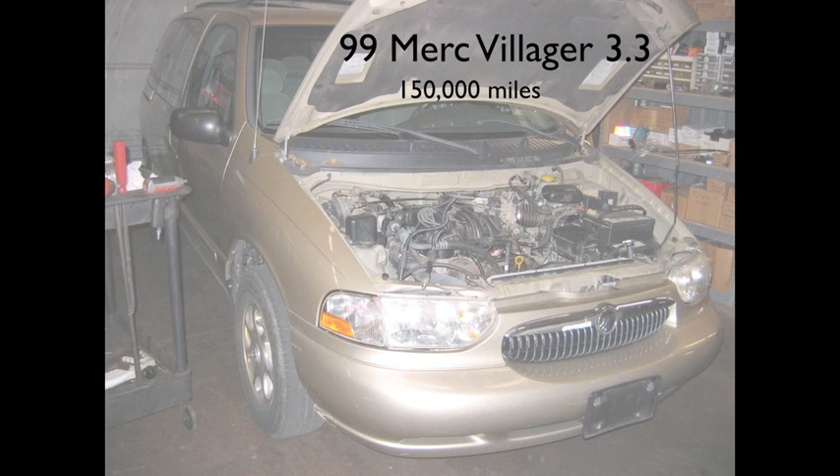You know, when we're trying to make a living fixing cars, you can't get paid on one until you fix it, and you can't fix it until you diagnose it. So it stands to reason that a quick diagnosis would mean a quick fix and getting a quicker payout. Let's take a look at an example. We've got a '99 Mercury Villager with a 3.3 and 150,000 miles on it.

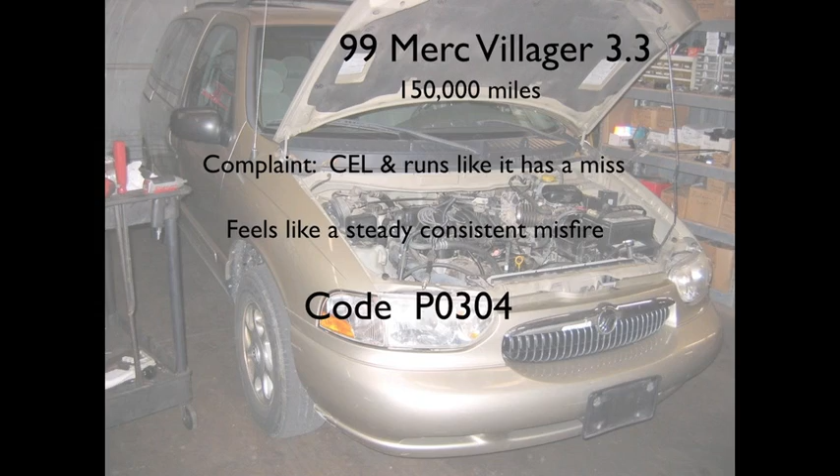When the customer brought it in, the complaint was that the check engine light was on and it ran like it had a miss. It feels like it's got a steady, consistent miss. And when we scanned it, we had code P0304, which indicates cylinder number 4 is misfiring. When we take a look at the intake here, now we've got to figure out a way to diagnose this quickly so that we can get paid on it. But we need evidence, right? How would you approach this?

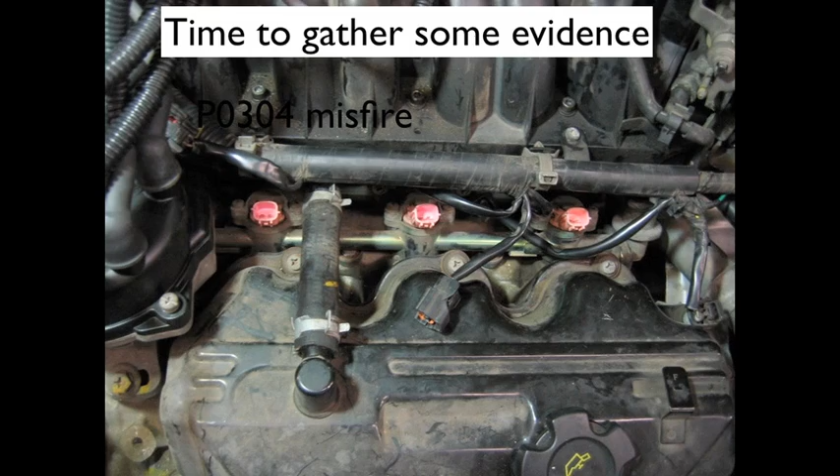Why would you do that? Now, diagnostically speaking, can you make any assumptions at this point? What are they, and how can they save you time? What step would you take next, and why? Now it's time to gather some evidence. We have a code P0304. We want to take out the spark plug and install a spark tester. Why are we doing that?

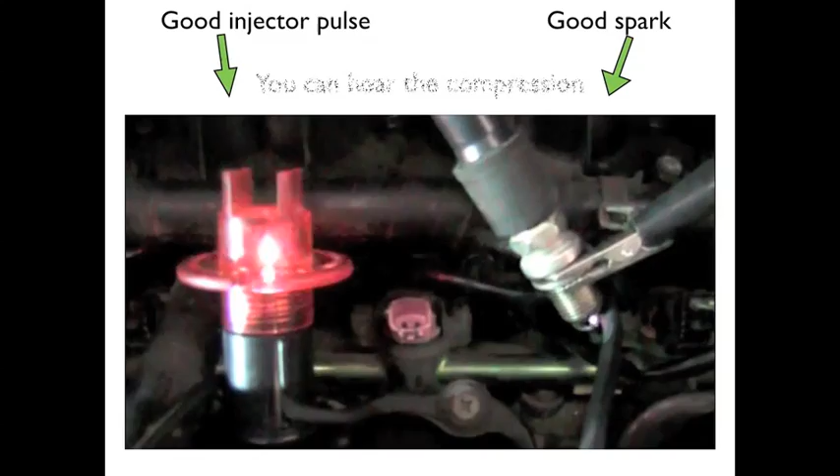Now you can see right here there's injector number 4. Luckily this one's pretty easy access. It's right up in front. So we want to install a noid light on the injector. Why are we doing that? Okay. Okay, what evidence does this method give you? What does the noid light tell you? Now, what does the noid light not tell you? How does that matter at this point?

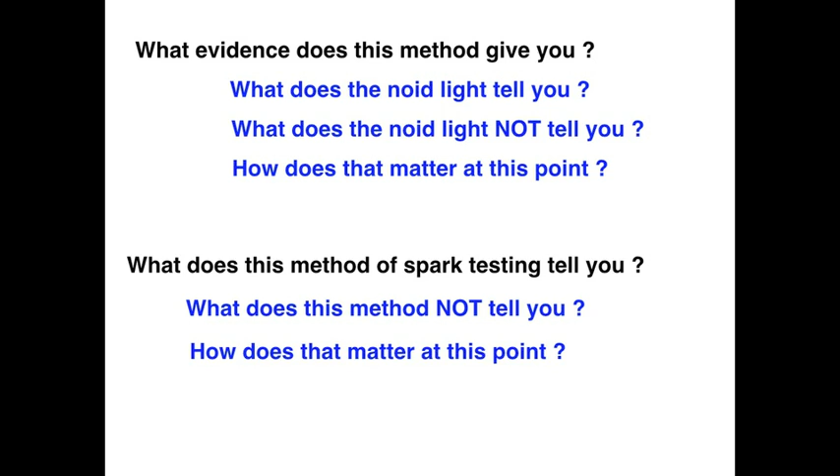What does this method of spark testing tell you? And what does this method not tell you? And how does that matter? What about hearing the compression? What does that tell you? Taking into consideration that you've got a P0304 indicating a cylinder number 4 misfire, is there a need to check the other cylinders at this point? Why and/or why not?

It starts, runs, and accelerates well. It just has a clear and present misfire. What evidence can you not see, but you can assume is there? Since it starts, runs, and accelerates well, there has to be adequate fuel delivery and pressure. And again, since it starts, runs, and accelerates well, but just has a clear and present misfire, we can rule out fuel pressure for now.

We can rule out compression for now because we can hear it. And we have good spark. We can see it. We also have injector control. We can see the pulse. But is it squirting fuel? So you need to know two things. What are they? Is it squirting fuel, and/or is it capable of squirting fuel? What's the next thing to check and why?

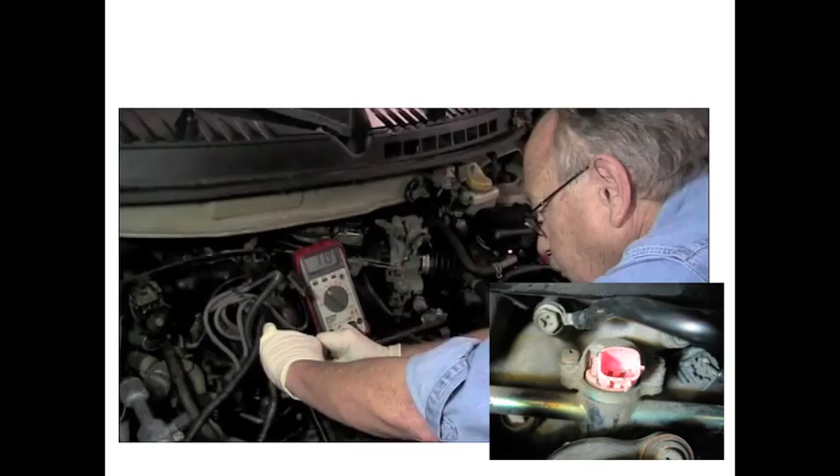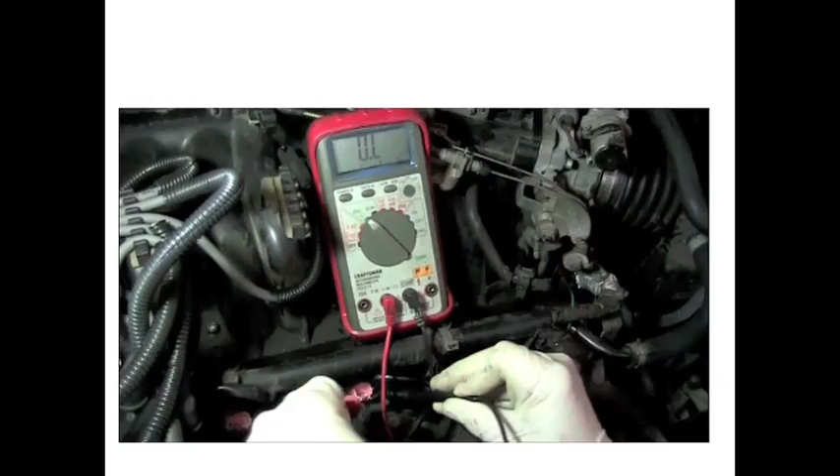Okay, we're using an ohmmeter to test the fuel injectors. We're on the first fuel injector. You can see by the pattern we got 11.8, 11.9. We're going to move to the second injector, the one that's suspected bad. Just use your red and black lead. And you see this one is out of limits. And we're going to go to the third injector.

You can see, tap in there. And 11.9. So we got 11.8, 11.9 ohms on two of them, but the middle one's out of limits, so that middle injector's got an open in it.

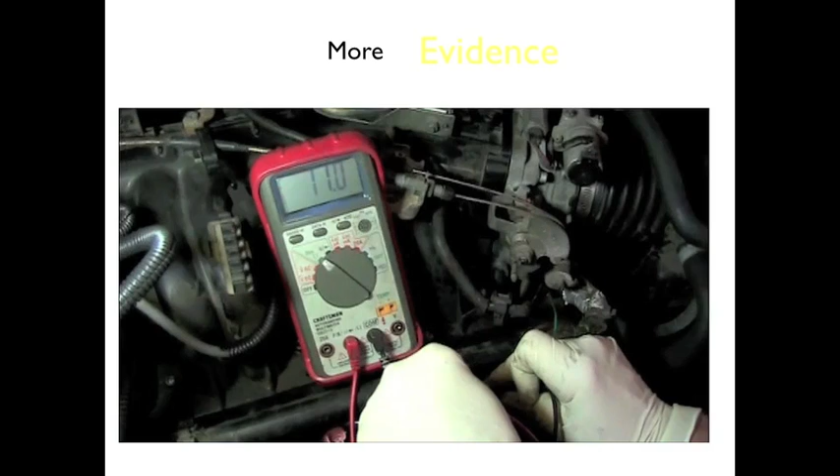So we installed a new injector, and it ran normally. The faster you can diagnose it, the faster you can fix it, and the faster you can get paid on it. Well, you might be saying that that was pretty easy, nothing real tough there. So you want to see something a little bit tougher. Okay, let's look at the same type of problem.

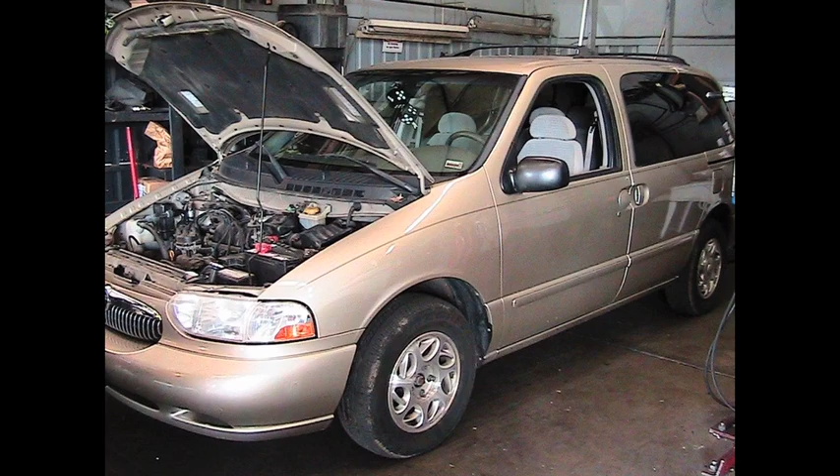Only this time we've got a 99 Mercury Villager 3.3, it's about 150,000 miles on it. The same complaint. Check engine light, runs rough, feels like it's got a steady, consistent misfire. This time we've got a code P0305, which indicates cylinder number 5 is misfiring. So we got the same age vehicle, same miles, same complaint, and basically the same situation.

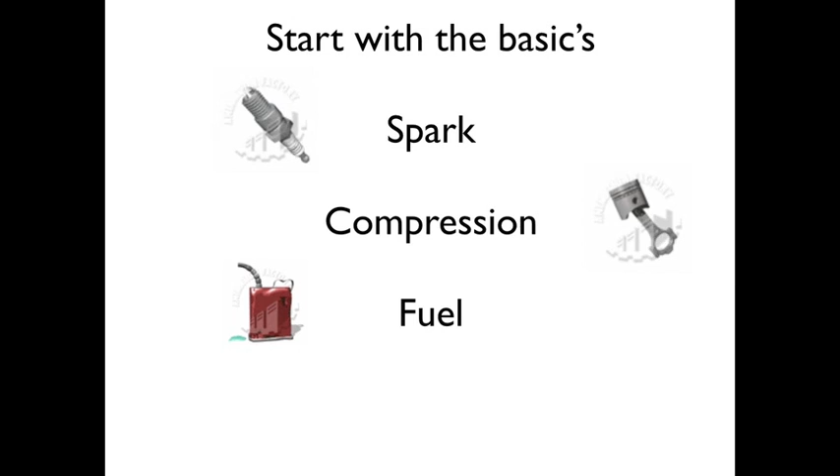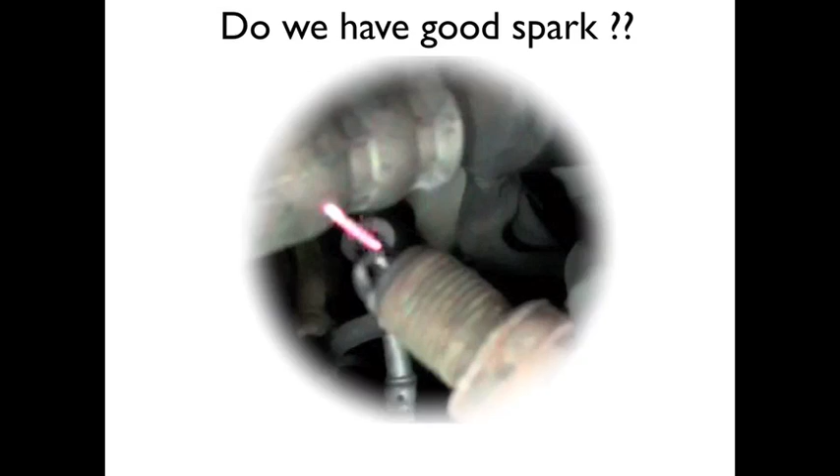So what do we want to do? Start with the basics, right? Spark, compression, fuel. So since it's running and accelerating well, we can rule out fuel pressure at this point. Do we have good spark? Well, let's see. Okay, if you look at that spark, and you've seen some of our other videos, then you can tell we've got at least 40 kV. So there is sufficient. There is plenty of spark.

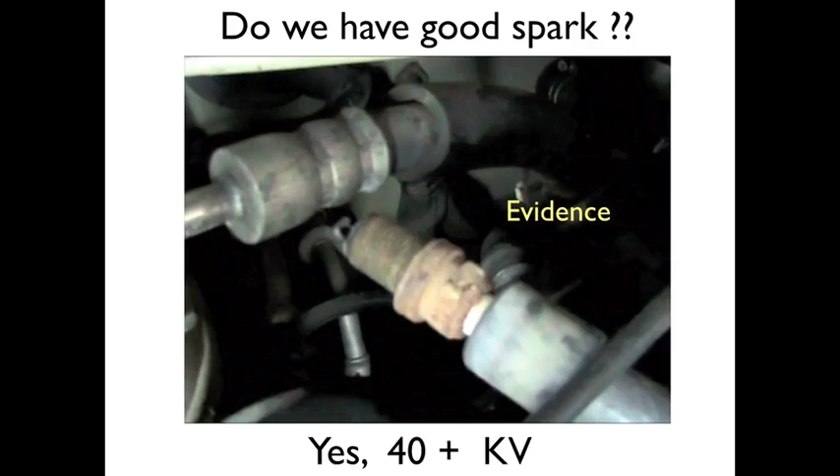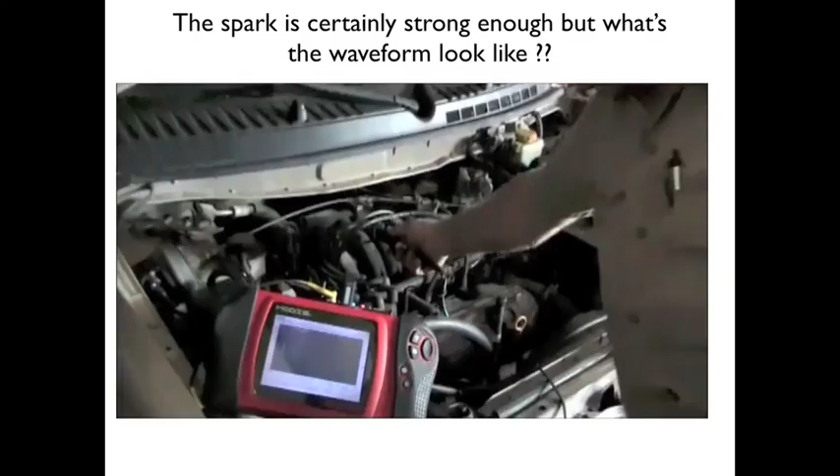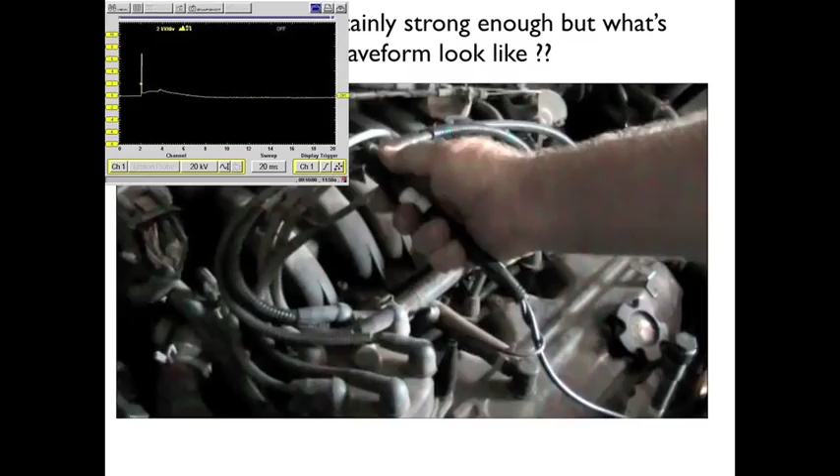Okay, we're looking for the ignition. We're going to test spark to see where we've got it. We're coming here. We're hooking up to a known good spark plug, not the one under suspicion. If you look at the lab scope, you can see a good secondary ignition pattern. I'll switch back over here. I'm going to switch to a second good one. Go back to the lab scope. You can still see the good pattern.

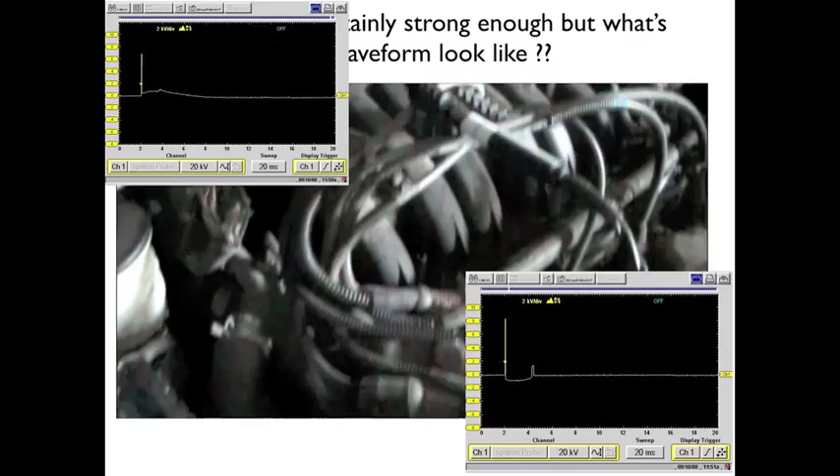Now we'll go back to the suspicious one, which is number 5. And we'll hook on to number 5. Go back to the scope and you can see the bad pattern. We've got negative burn time. Your spark is firing. Negative burn time. Something's wrong with that injector.

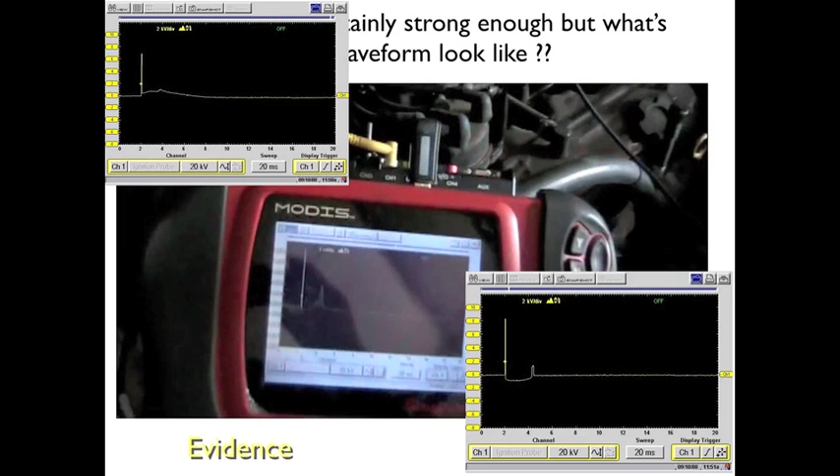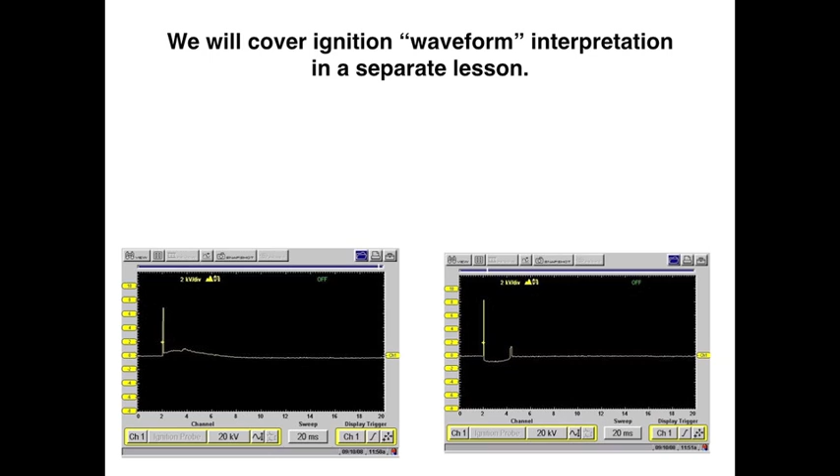So the first question is, what is an ignition waveform and what can it tell you? Second question, in the video, why did I look at more than one waveform? Okay, we'll cover ignition waveform interpretation in a completely separate lesson. But for now, what do you see different in these two waveforms? So understanding what waveforms are, why is this evidence?

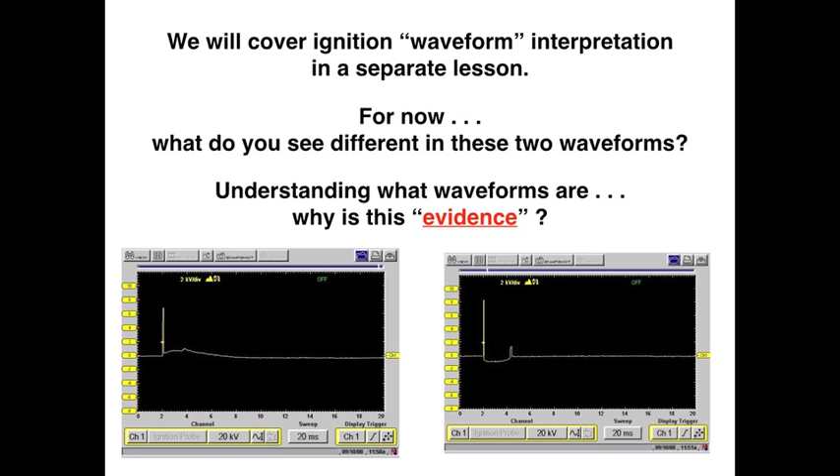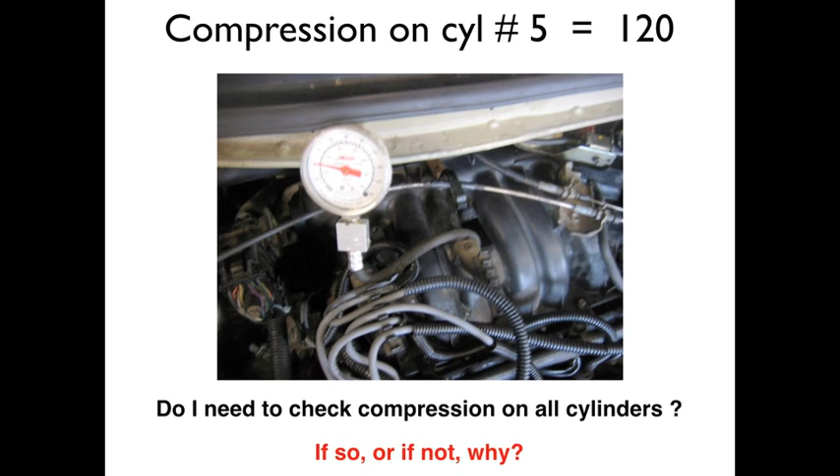So we do a compression check and we see on cylinder number 5, the one that's missing, we got 120 pounds. Do I need to check compression on all the cylinders? If so, or if not, why do you say that? So spark is good, compression is good. So by the process of elimination, are we safe to say that it must be a bad injector?

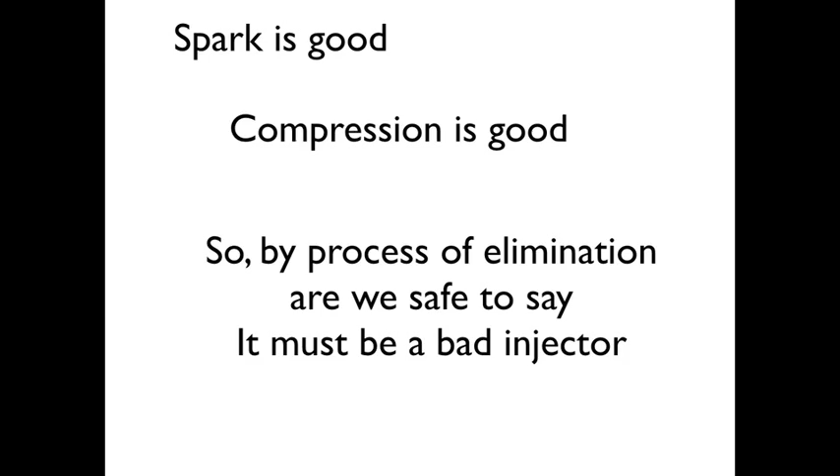Okay, here's the intake. Now you can see the plastic intake is still installed. And when you look at the front of the engine, you can see that we've got the front injectors and the front spark plugs that have pretty good access. Pretty easy to get to all of them. That's one thing that's nice about this type of situation. However, injector number 5 is under the intake. It's under the plastic intake.

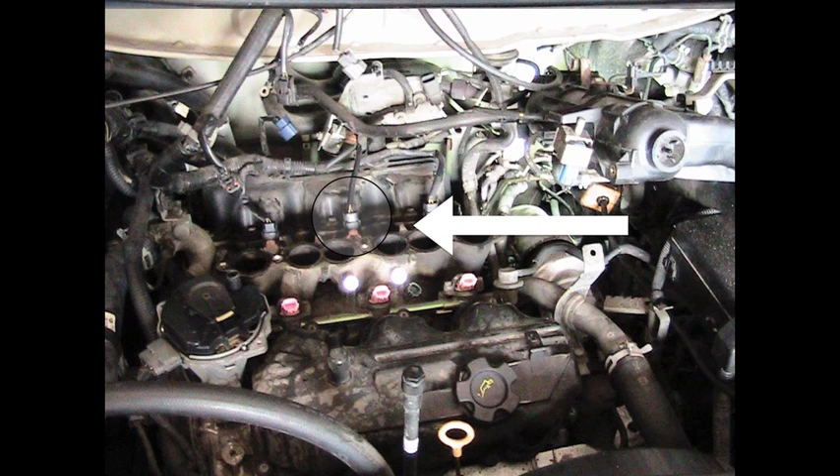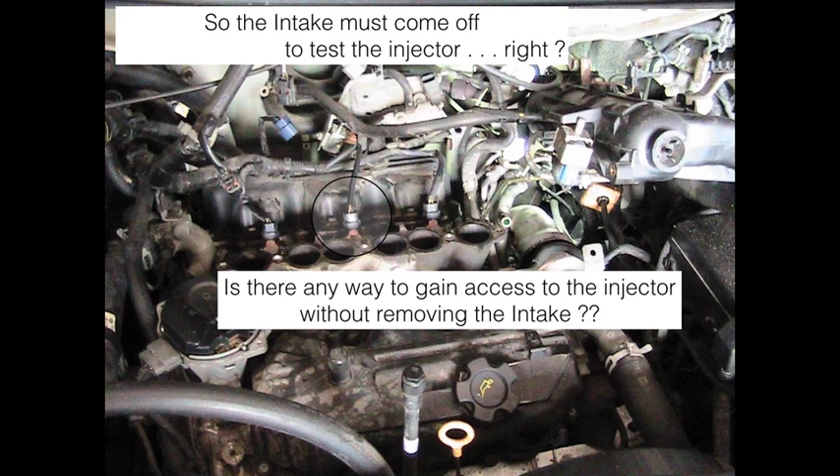In fact, when you take the intake off, you can see there is injector number 5, and we're pretty suspicious that number 5 is the injector, right? So the intake has got to come off to test the injector, right? Is there any way to gain access to that injector without removing the intake? Well, let me ask you this. What, in relationship to the injector, is not under the intake?

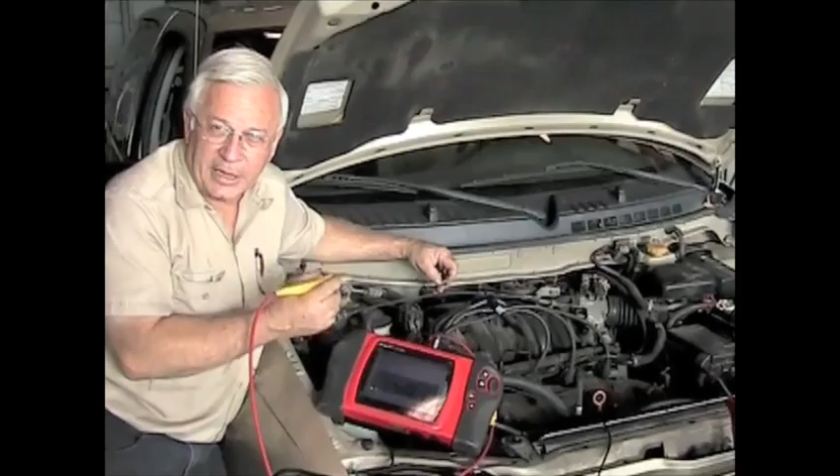So if we look at the engine with the intake installed, let's look right over here. That is a connector for all of the injectors. So the injector wires are under the intake, but they can be accessed from above by going to where those wires connect. Okay, I'm going to try and test for an injector. I'm going to first test a good injector so you can see that, and then go to the bad injector wire. We're going to the best connection right here.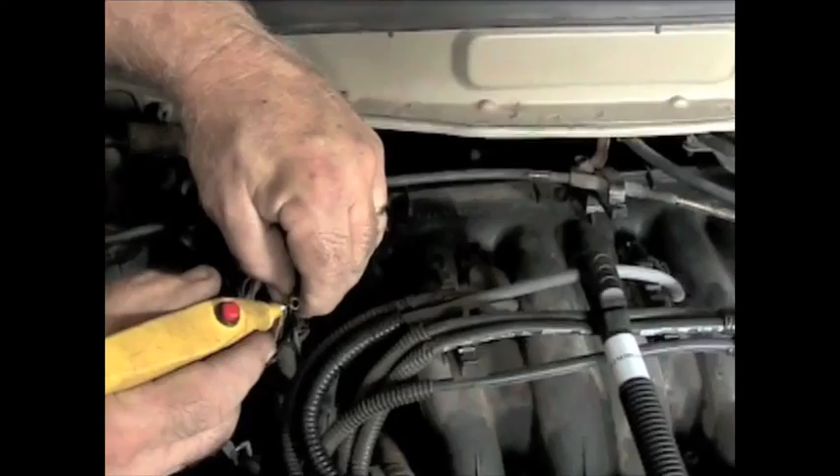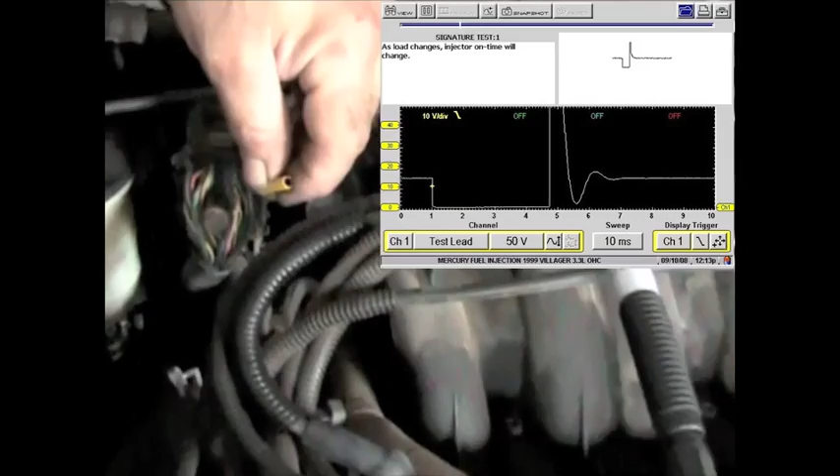Come down in here, locate my wire, pierce the wire. Now if you look at the lab scope, you can see the good injector pattern. I'm going to take that out of there, come back to the harness. I'm going to go to my suspect injector. Go to the lab scope and there's no signal. We got a dead injector. Got an open circuit in that injector.

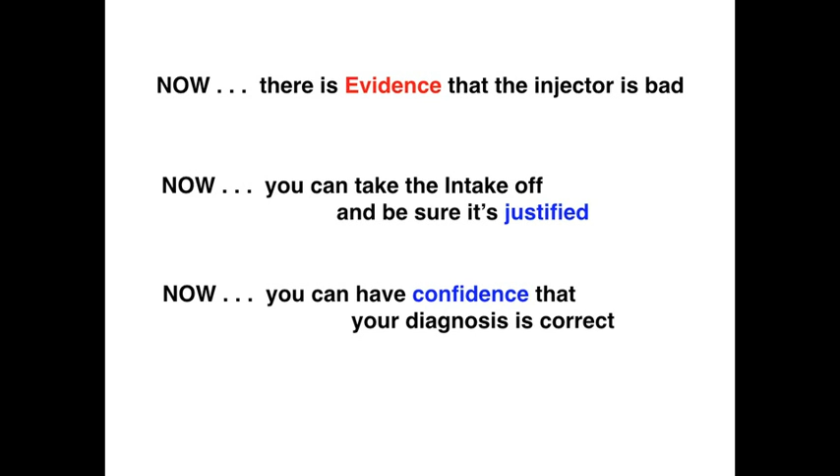So now there is evidence that that injector is bad. Now you can take the intake off and you can be sure that it's justified. We're not going to do something that we don't need to do. Now you can have confidence that your diagnosis is correct. Once the intake is off, that injector is out, you can put it on the bench and test it then and confirm that it does have an open.